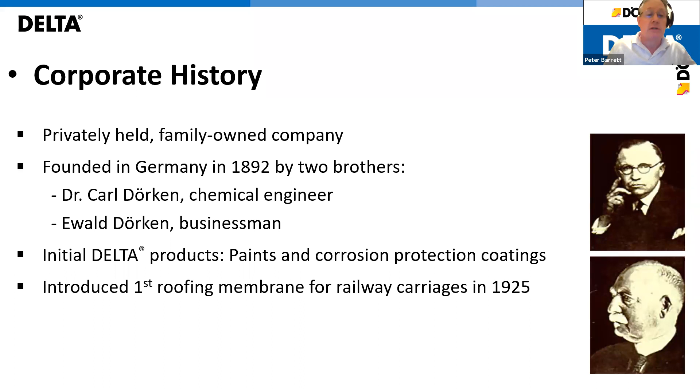We began in paints and corrosions, and we have since moved into all sorts of different construction product envelope applications. We make water-resistant barriers, the Rainscreens you'll hear about today, air barriers, vapor barriers, roof underlayments, garden roof systems, foundation moisture protection, mostly well known as our famous Delta MS, and we work on both residential and commercial construction.

My part of the presentation was done in conjunction with RDH Building Science Laboratories, which helps ensure that you guys get good technical information from me.

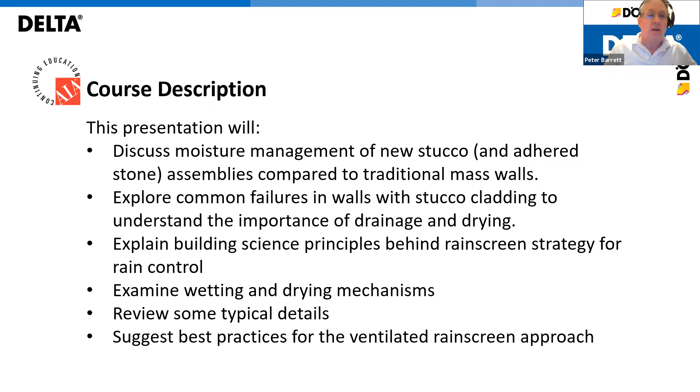So, Rainscreens - a builder's experience. We'll look at ventilated Rainscreens with moisture management. Today we're going to discuss moisture management of new stucco and adhered stone assemblies compared to traditional mass walls. We'll look at common failures within stucco cladding, and explore the importance of drainage and drying. We hope to explain the building science principles behind the Rainscreen strategy for rain control. We'll look at wetting and drying mechanisms, look at a couple usual details, then talk about some best practices for the ventilated Rainscreen approach.

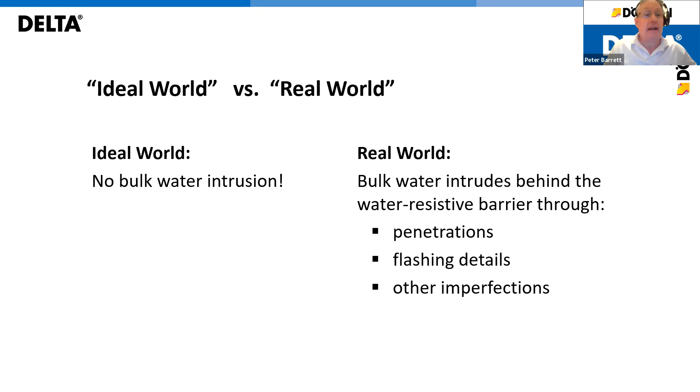So some common failures in stucco walls. In essence, the most common failure of stucco walls is water intrusion. In an ideal world, we have a perfect barrier and get no water intrusion. In the real world, we get water moving through our cladding, whether it's stucco, stone, or other claddings. We almost always get water through our cladding - it comes in through penetrations, through flashing details, and other imperfections.

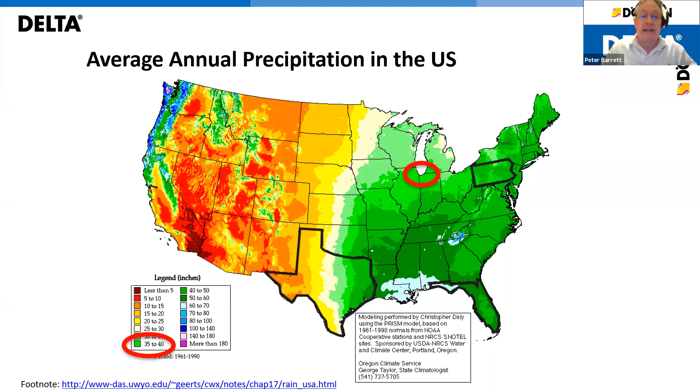Here is a quick look at the average rainfall in the US. The reason I'm showing you this is to show you where Chicago is on here, because this is where Chris's case study will take place. I just wanted to show that Chicago is a fairly moderate climate - it gets an average of 35 to 40 inches of precipitation a year.

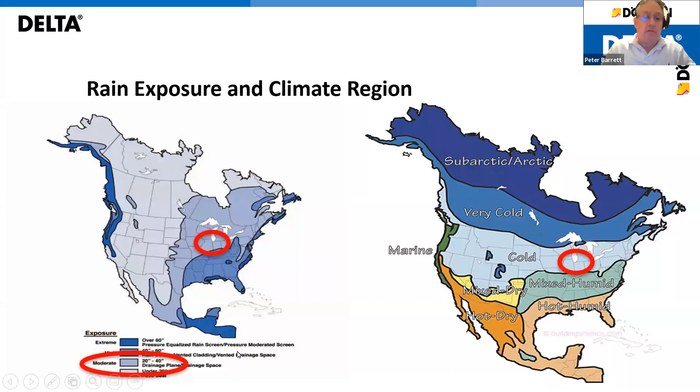By the same token, we want to look at rain exposure and climate region. Again, Chicago turns up in the moderate range when it comes to rain exposure for cold climate regions. You'll see 20 to 40 inches - in other words, you need drainage space in the wall.

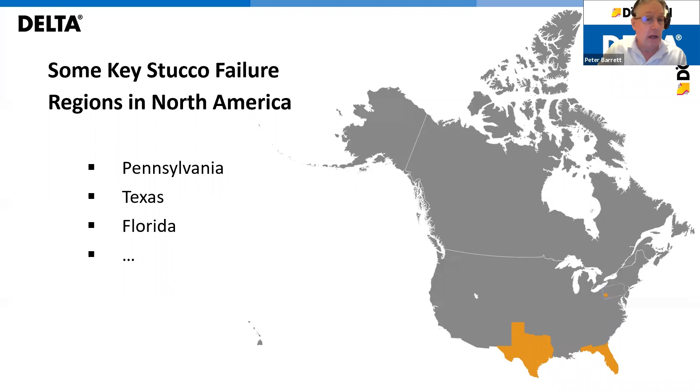Some key stucco failure areas in the US continue to be places like Pennsylvania, Texas, and Florida. What Chris is going to show you today happened in suburban Chicago, and I really wanted to show you that Chicago is not an extreme climate - it's a moderate climate, and a pretty common experience for both the US and Canada.

So why do stucco assemblies fail? Well, in essence, too much water gets through it - either through cracks in the stucco, through unsealed penetrations and transitions, or there's either no or insufficient flashing.

Additionally, when that water gets in, it's often blocked from coming out - in other words, there's no drainage for the system. Your system becomes a water collection device instead of actually draining water like it ought to. That usually comes from lack of weeps or drip screeds, or you haven't put the drainage in there properly, or there's lack of flashing so the water's running where it pleases, or the adhesion of the stucco to the WRB or weep screed is weak.

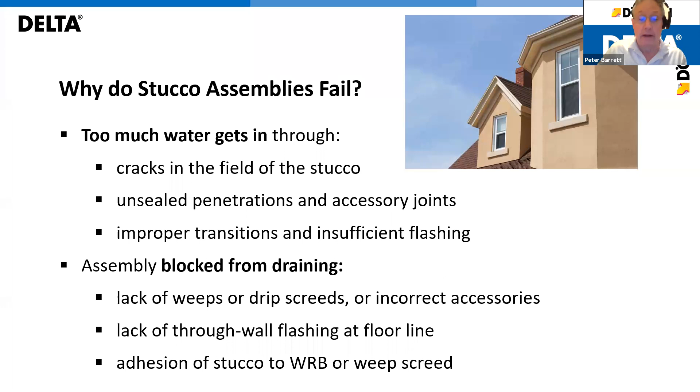Adding drainage capacity behind stucco is cheaper than replacing rotting sheathing. That's probably going to be the main topic of Chris's presentation, introducing some rain screen strategy.

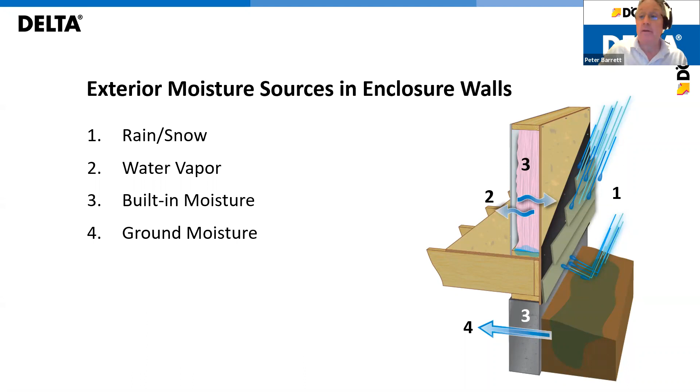What are the interior moisture sources for an enclosure wall? Wet building materials or water intrusion that sits in there—all of those wet materials will want to dry. When that water leaves the material, it has to go somewhere, and it usually goes into whatever cavity space it can find according to the moisture vapor pressures on it.

Then there's moisture from life itself, what we call operational moisture. Humans give off a lot of moisture through perspiration. We also like our plants and pets. We clean the place, we shower, we do laundry and dishes, water pipes break, or maybe we find it too dry and intentionally add humidification.

How do we control moisture? Moisture management is really what we're talking about today—what to do with the water when it hits. Rain control has four fundamental D's.

Deflection means when it hits, we send it where we want it to go, done through flashing and eaves troughs. Drainage is meant to keep the water out and send it to a collection point where we can carry it away harmlessly from the building.

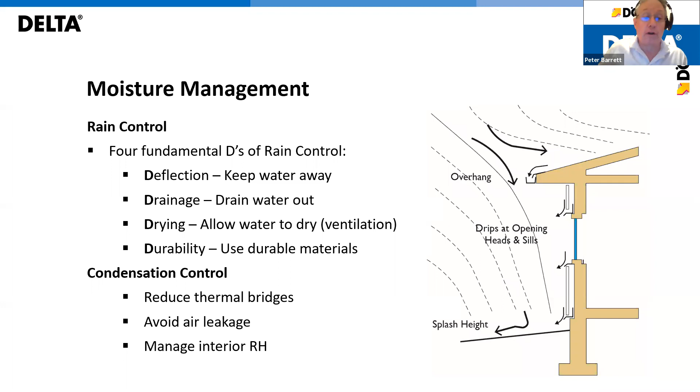We also want to control condensation. We do that through the reduction of thermal bridges. We definitely want to avoid air leakage, as air transports much more moisture than movement by diffusion. In doing so, we also want to manage our interior relative humidity, which helps manage the moisture vapor pressures within the building.

Concealed barriers—why do they fail? The concealed barrier is the barrier behind your stucco. What you're seeing here is an extremely common stucco assembly. From the inside out, you have framing, followed by sheathing, in this case most often wood-based.

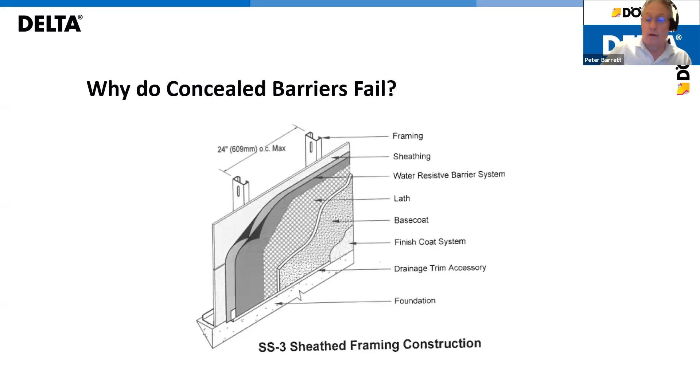Then you have a water-resistive barrier system. This can be either two layers of a 10-minute grade D equivalent building paper, or a single layer of 60-minute grade D equivalent building paper. Then there's standard lath, which could be metal or fiberglass. Then comes the stucco, base coat and finish, along with trim accessories. We're also showing a little foundation there. The ventilated rain screen is the most robust rain control strategy.

What does the building code say? The International Residential Code says—this was changed in 2006—that it requires a means of draining the water that enters the assembly to the exterior. It does not explicitly say what constitutes that drainage, and we have the same wording in 2018.

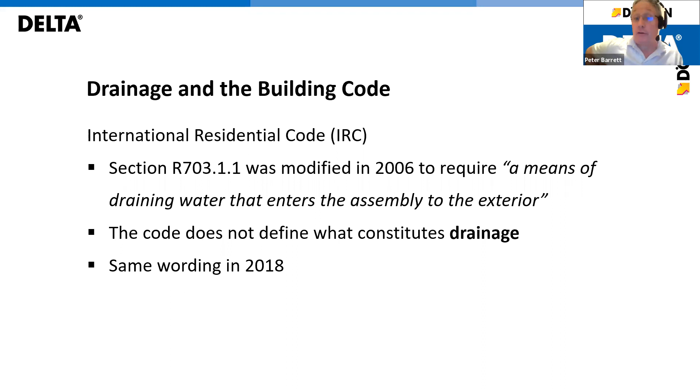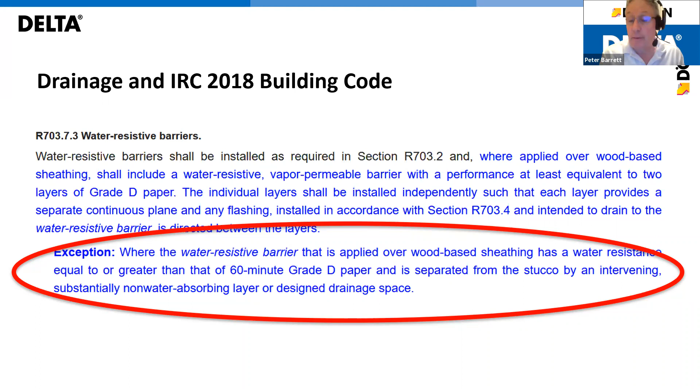Here's the actual section from the 2018 code. I won't read all of it, but the spot that interests us most is here—this is really where a rain screen can fit into the code, where the water-resistive barrier applied over wood sheathing has a water resistance equal to or greater than that of a 60-minute grade D building paper, and is separated from the stucco by an intervening substantially non-water absorbing layer or a designed drainage space. In this case, the dimple membrane or Delta-Dry that Chris will talk about constitutes both the substantially non-water absorbing layer and the designed drainage space, so that it meets code over wood-based sheathing, as long as you use a grade D 60-minute paper.

Which is, by the way, pretty much any decent water-resistive and air barrier—in our case, that would be Delta-Vent SA or Delta-Stratus, both of which are a grade D 60-minute equivalent. So what is a rain screen strategy? Well, we clearly want to shed it, and we do that with the exterior cladding.

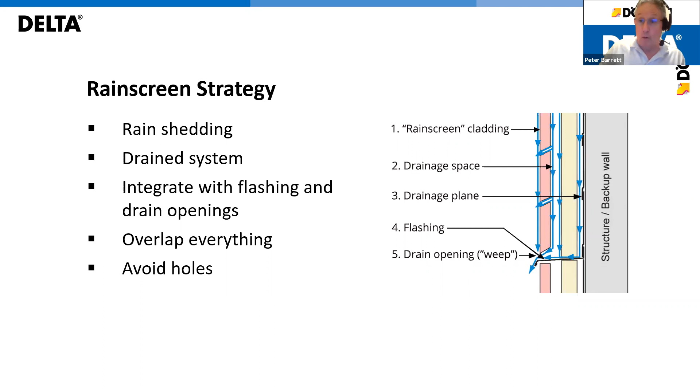Drained - that is space for when liquid water gets in, which may in turn drain out using our friend gravity. We want to integrate flashings and drain openings properly, shingled to the exterior so water runs to the outside of the building. Overlap everything, shingle downward, water runs downhill. We'd like to guide it correctly to the exterior. We do not want it to stand around, and obviously we want to avoid holes, which can allow both air and liquid water to get in.

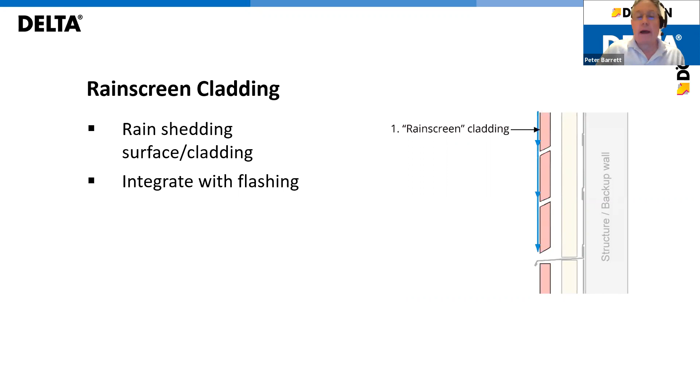So what is a rain screen cladding? Well, a rain screen cladding is a rain shedding surface integrated with flashing, with a structural backup wall and drainage space. Let's quickly look at how water moves.

I mentioned gravity earlier - gravity is our friend. Gravity can help us, using flashing, redirect water to the outside, which basically saves it from hanging around. We clearly design houses that way quite regularly. As you can see by the little drawing there, we generally always design a building to direct water to the outside, or we should always design it to direct water away from the building.

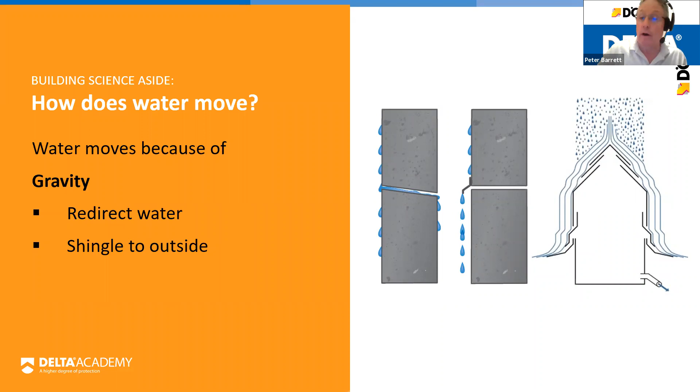Another big problem is capillary wicking, with the cohesion and adhesion of water and its surface tension. What that basically means is water can travel quite effectively through a small crack in any material. It can travel up concrete substantial distances, and it can travel up wood substantial distances as well. How do we know that? Well, trees have leaves at the top and not the bottom, so we know that capillary action of the wood allows water to move up to feed the leaves.

So how do you handle capillary wicking? Well, as you see in the drawing on the right, we put in a capillary break - something that is non-porous, that does not allow the water to continue to move.

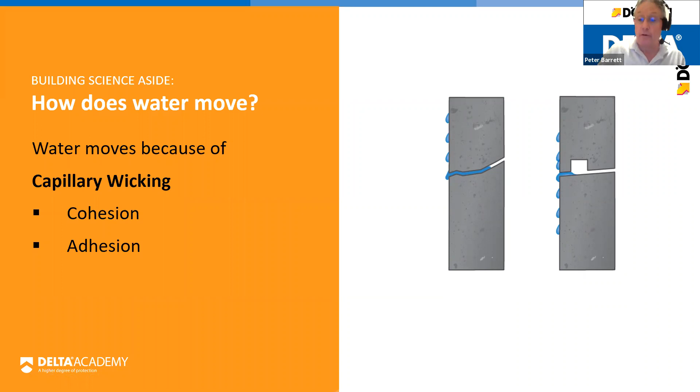It also moves through pressure differentials. We get many pressures on the house, in particular wind pressure. So on the windward side is an area of high pressure, and on the leeward side becomes an area of low pressure. This is essentially the same thing that makes airplanes fly, but that has a different meaning on a house, because if you get high pressure to the windward side, the interior of our house is actually lower pressure relative to that high pressure.

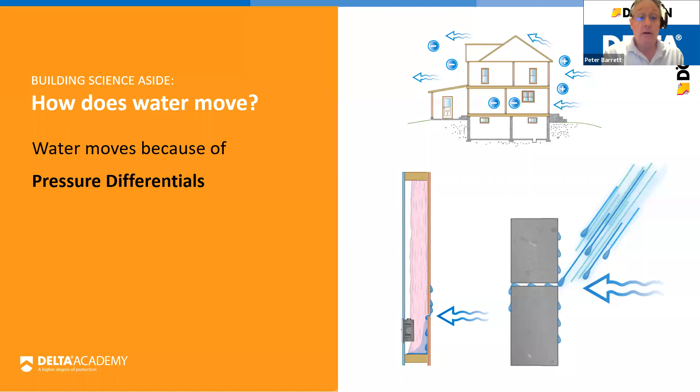What does that mean? If you have a hole in your wall, our drawings below show that if you put pressure on the wall and you have moisture, in essence your building will start sucking water in those little holes, because it's high pressure on the outside, lower pressure inside. In essence, it gets sucked in.

The drainage space - a drainage space obviously creates a space for liquid water to flow down. It actually doesn't take all that much space in the wall to get the drainage portion itself. Anything from 1/8 of an inch to 1/4 inch will give you drainage. What 1/8 of an inch to 1/4 inch does not give you is ventilation. So we're distinguishing here between a drainage space and a ventilation space. With a larger gap, you also get airflow, and the airflow helps moderate the moisture in the cavity - it takes moisture from the cavity to the exterior.

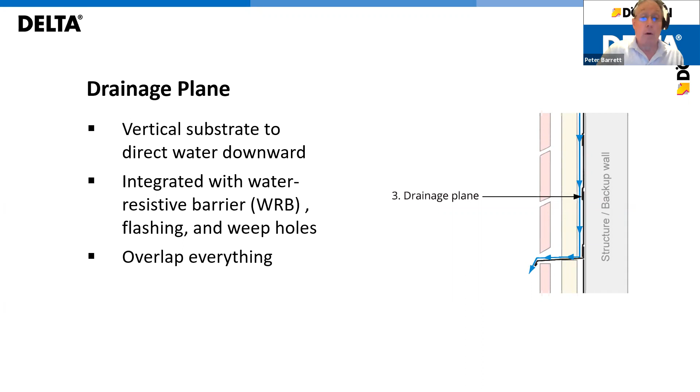We also have a drainage plane in our rain screen. Again, this is a bit of a repeat of what I said earlier, but I'll say it anyway: shingle downward and allow the water to flow to the exterior, integrate with your flashings. Flashings are really any material that will act as a drainage plane and shed the water as opposed to absorb the water.

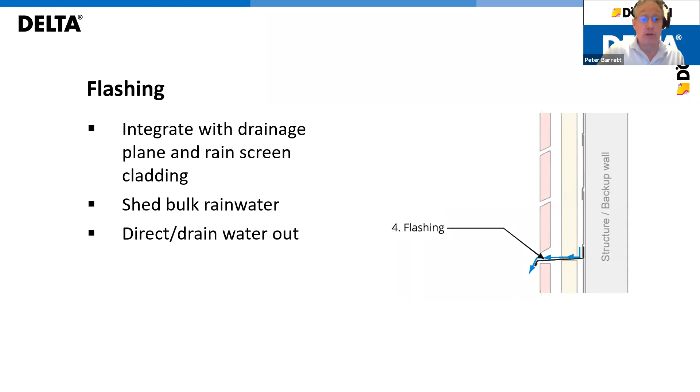An opening - this sounds very sensible, that if you're going to put a drainage space in there and we're going to allow water to drain down, we would like someplace for it to go once it gets there. That would be our drainage hole, or our drain. That drainage hole will allow liquid water to move out, it will allow fresh air to move in, and it will help promote venting and ventilation.

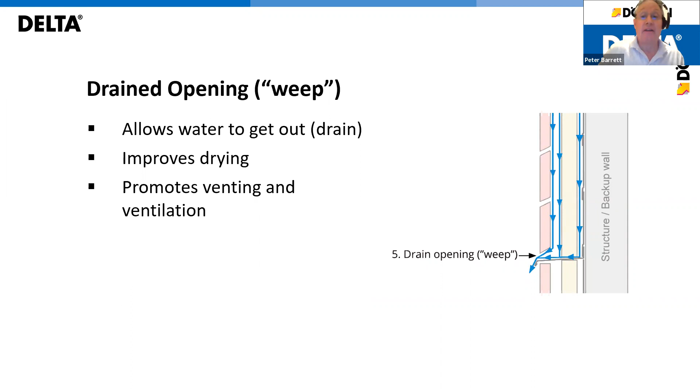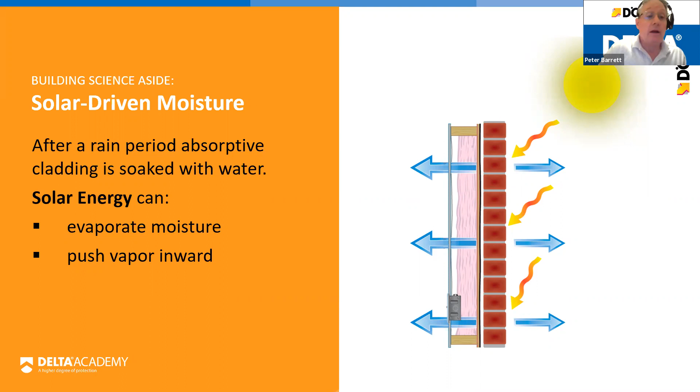Solar-driven moisture - in building science, we're going to talk about solar-driven moisture because not everybody even believes that this exists, but it is a significant problem whenever you're using an absorptive or reservoir cladding. So the cladding itself will absorb moisture, and solar energy will both cause the moisture to evaporate but will also push the vapor inward. This is just an example of, let's say, some manufactured stone that is a reservoir cladding.

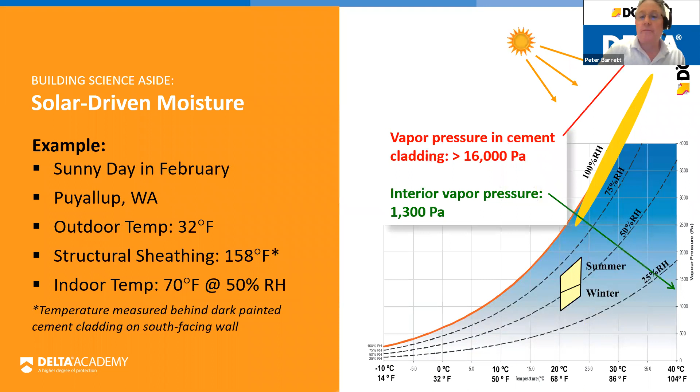So how does this work? Well, if we have indoor conditions at a pretty typical, let's say 70 degrees Fahrenheit, typical interior 35 to 50 or 65 percent relative humidity on the inside - sorry, just got to move things here so I can see.

As the sun hits our exterior cladding, it heats it up. If we have a stucco cladding, it can get very hot just due to the solar energy, and it can create a moisture vapor pressure greater than 16,000 pascals. But because it's cooler and drier inside, we have an interior vapor pressure of around 1,300 pascals. As this notes here, your sheathing temperature can get up to over 158 degrees Fahrenheit.

One thing we always know about moisture vapor is it moves from areas of high concentration to areas of low concentration, seeking stasis. The high moisture vapor pressure on the outside means that a lot of that water that is soaked into this wall like a sponge cannot dry to the outside. It has no choice but to move inward.

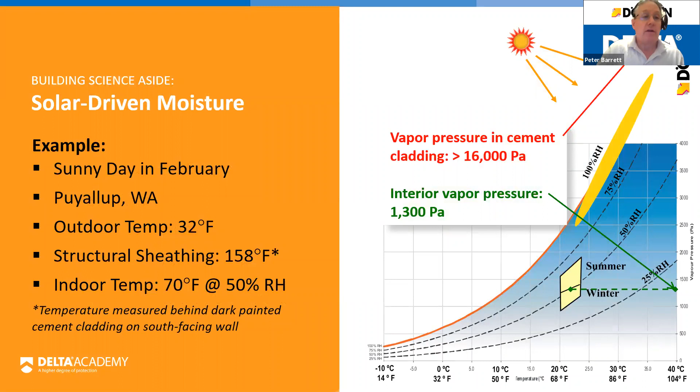You can basically see on this, I guess it's a small version of a psychrometric chart, that solar-driven moisture does exist and can drive significant amounts of water in.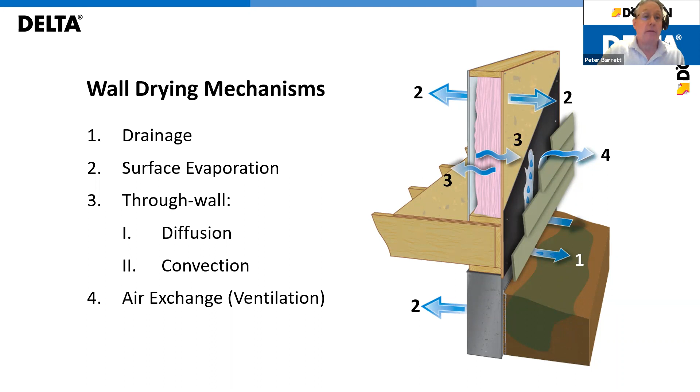Once we have moisture, how do we dry it? Well, through drainage, as I said, through some surface evaporation, but also through the wall, through diffusion and moisture vapor permeable membranes, and also through convection, which we take advantage of with the air exchange, adding ventilation that allows the warm, damp air to move up and out, bringing cooler, drier air in the bottom, thereby moderating the humidity in the cavity.

There's a bunch of different ways one can apply cladding. A direct cladding would be, let's say, some lumber siding that's just put directly on the WRB, or even stucco placed directly on the WRB. Vented means some air can get behind it - a good example of that would be vinyl siding. Or ventilated, that has both a drainage and ventilated space. As you move from left to right, incorporating a ventilated rain screen actually reduces the risk of mold and rot and improves the sustainability.

In summary, water will find its way behind the water resistant barrier. Depending on your climate and region, the stress of that or the rain load could be even higher. Most stucco failures involve cracks, penetrations, sealant joints, blocked drainage paths. By giving water a place to go, that means that it will not accumulate in the wall. And by adding drying energy, the water that does hang up in the wall or the moisture vapor that comes off our wet material or through the other sources has a place to go. It can rise and dry out, and the system is moderated.

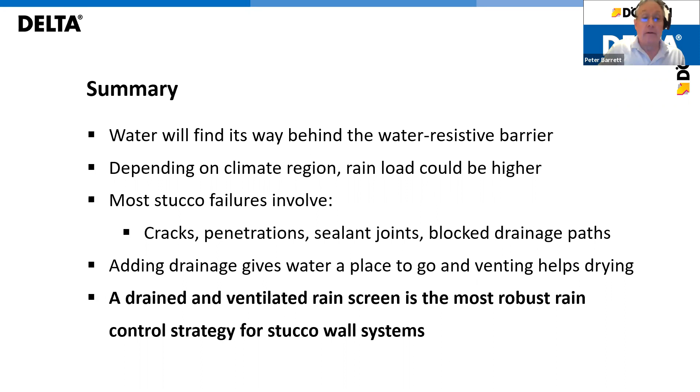Therefore, a drained and ventilated rain screen is the most robust way of controlling moisture in a stucco wall system.

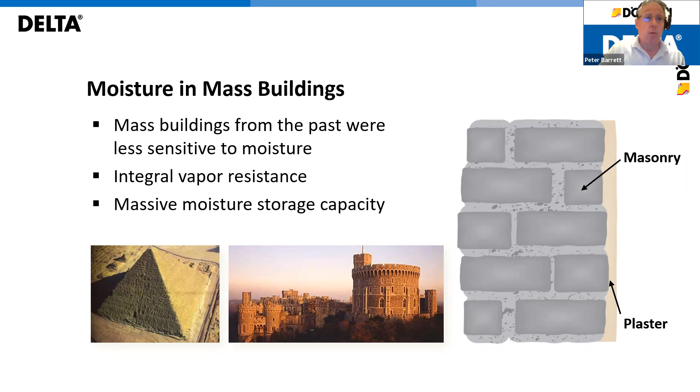So let's quickly look at a mass building. This would be anything with large stone, limestone, even the pyramids. They have an integral moisture vapor resistance. They have a very large ability to store water that hits them without incurring any damage at all. It used to be that they would just put stucco directly on a mass wall.

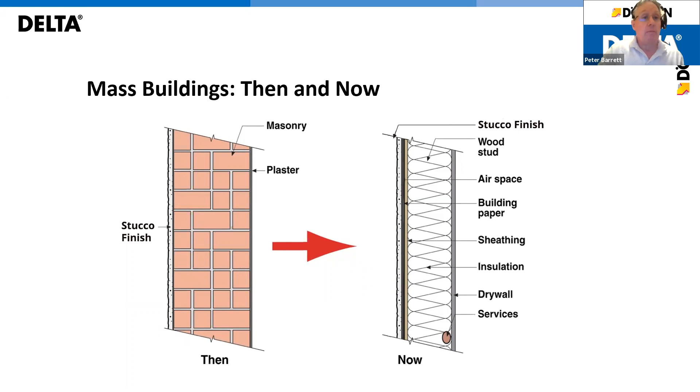Probably not much of an issue, but we've changed the kind of materials that we use. We don't build with mass walls so much here anymore. We use much more moisture sensitive materials - drywall, wood, insulation, papers, whether it's on the drywall or otherwise, all of which can be adversely affected by moisture much more significantly than could a solid masonry wall. What does that mean? Well, that means that the management of moisture becomes more critical because our materials are much more sensitive.

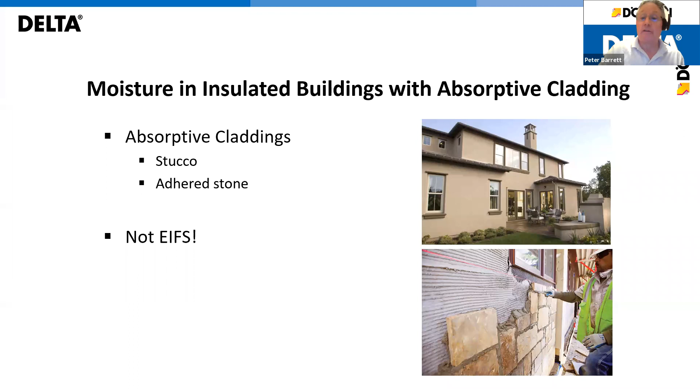Not only that, but we've added a lot of insulation to the building. In this case, we're really referring to absorptive claddings like stucco and adhered stone, but not EIFS.

A wet cladding will allow inward diffusion through a vapor permeable membrane. It's a really important point - anything that's moisture vapor permeable is moisture vapor permeable both ways. There is not a way to have a material that only lets moisture pass through it one way. So if it allows moisture to come out of the building to dry, it can in turn also allow moisture to be driven back into the building by processes such as solar-driven moisture.

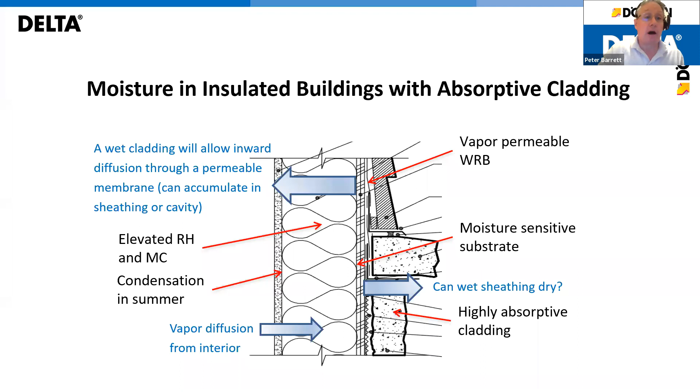Considerations for moisture management with highly absorptive claddings, again stucco and manufactured stone: poor drainage is a problem. As I said earlier, water gets in but can't get out.

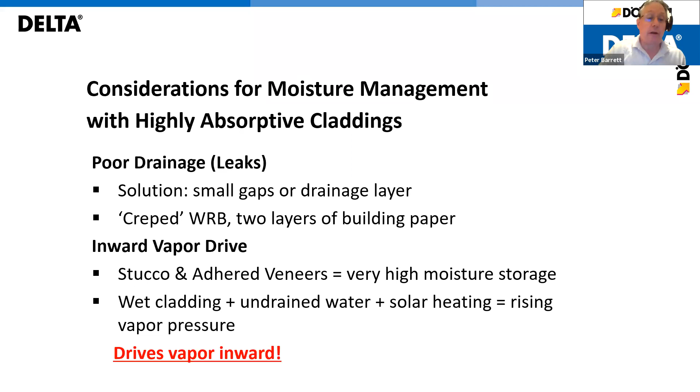There are some solutions. You can put in a small gap or a drainage layer, anywhere from 1/8 to 1/4 inch. Sometimes that can be achieved by creped stucco building wraps or two layers of building paper. But because stucco and adhered veneers have very high moisture storage, and solar driven moisture due to solar heating can create moisture vapor pressure and drive the vapor inwards.

So heat, air, and moisture flow in the ventilated air gap. First, with a solid impermeable product, it will deflect and drain the bulk water. A big question is often, if I put an impermeable product in there, am I not putting in a second vapor barrier? The answer is no, because this is not detailed as a continuous vapor barrier.

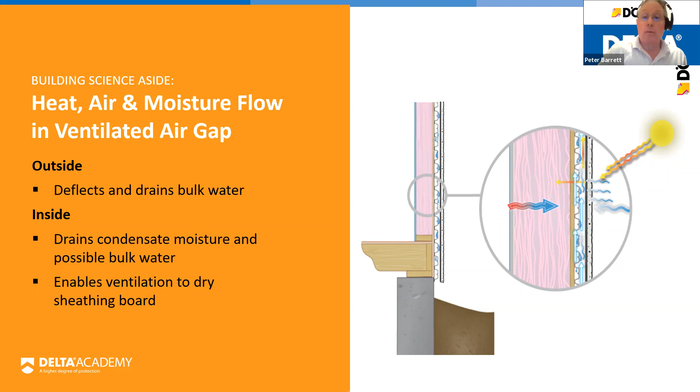It's extremely important to the function of a rain screen that you have ventilation at the top and at the bottom. With that ventilation, it will not act in any form as a vapor barrier in the wall system. It does, however, enable ventilation to dry the sheathing board, allows any condensation or bulk water to drain out, and prevents the inward drive of solar driven moisture.

This is just to show you quickly what a top detail looks like. You can see there's about a 3/8 inch gap between the flashings for ventilation. It doesn't have to be a huge gap, but you do need a gap.

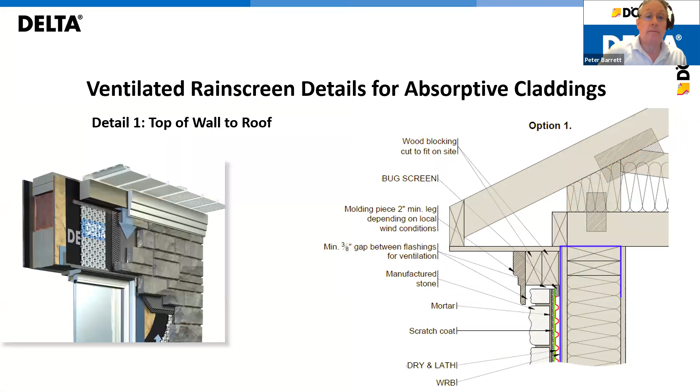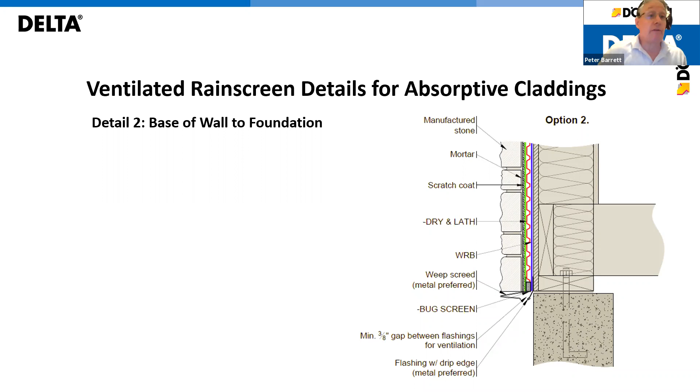Similarly, at the bottom of the wall, just using a typical weep screed—nothing special about this. You would install your stucco the same way you normally do, just in front of the material. So no additional fancy changes. You can see in this picture, it's the same weep screed you would normally use.

So to summarize, we use a lot of different materials. The old walls are not like the new walls. We didn't build the same way your grandfather did. New stucco walls need to be detailed in order to allow moisture that gets in to get out, and to allow water that hangs in the wall to be dried. A drained and ventilated rain screen is the most robust rain control strategy for stucco and stone walls.

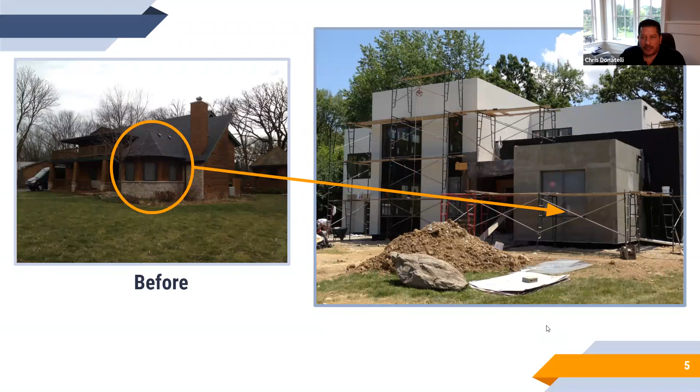To give you a little perspective of the scope, I included this before picture, circled the front area where you could see the before and after. You can also see the stucco starting to go together, in progress. Some areas in black are where the future wood siding accents will be, but the gray and white is all stucco.

When we started this project, there were already concerns in my area about different types of stucco, and I was certainly concerned with putting stucco on a building because of some of the problems I had seen.

In addition to the minimum code requirement, we also installed a WRB consisting of a stucco wrap, promoted as something that helps drainage, and we also installed a small gap drainage mat. I had assurance from everybody I talked to at the time that this combination of products was all we really needed to keep everything safe.

So the wall assembly was 2x6 studs, dense packed cellulose insulation with OSB sheathing. We then used the stucco wrap as the WRB, and a small gap drainage mat. In limited areas we used polystyrene foam, due to some details the architect wanted to achieve in terms of returns around some of the windows.

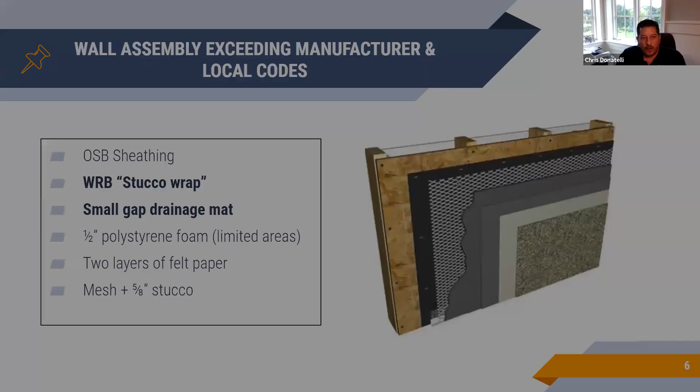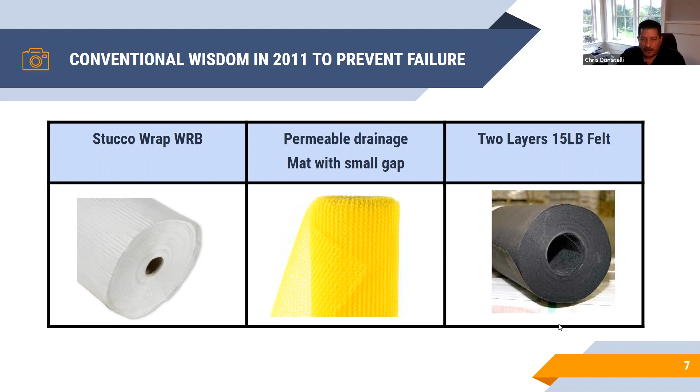So my conventional wisdom in 2011 was that a stucco wrap with a drainage mat and 2 layers of felt was certainly going to keep us safe on this project. That, of course, assumes you're taking the time to detail everything properly and carefully executing everything, because none of this matters if it's not carefully executed.

So now let's fast forward 10 years and take a look at what we actually found as we started to realize there were some problems, and made the decision to take off all the cladding.

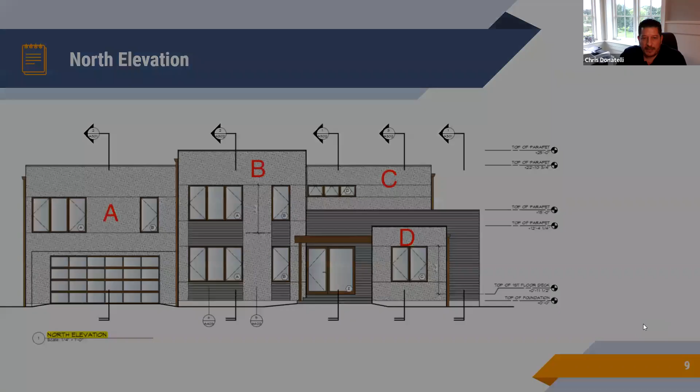So this is the north elevation, which is the front, and this is what we noticed when we started to take this apart. The north is one of the exposures that gets the least amount of sun. Both the north and east get a lot less than the south and west.

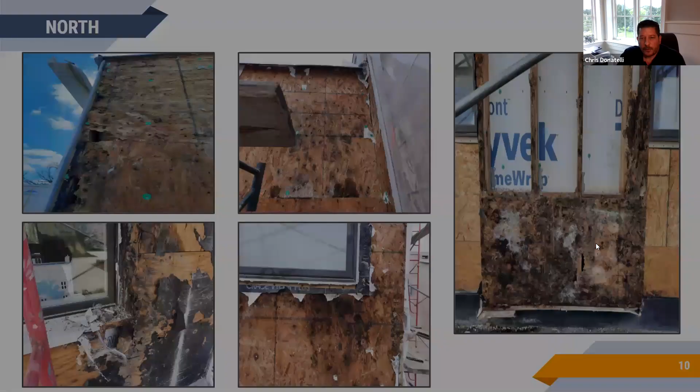So now we move to the east elevation. Again, this is an elevation that doesn't get a tremendous amount of sun. I'll also note that there's not a tremendous amount of trees around this house, so the natural movement of the sun is pretty much unblocked on most of these elevations, just as a side note.

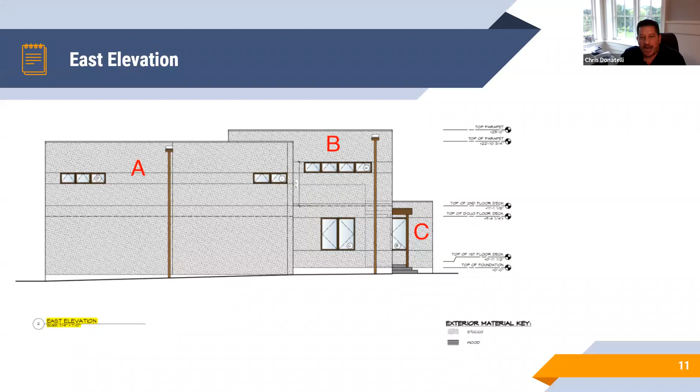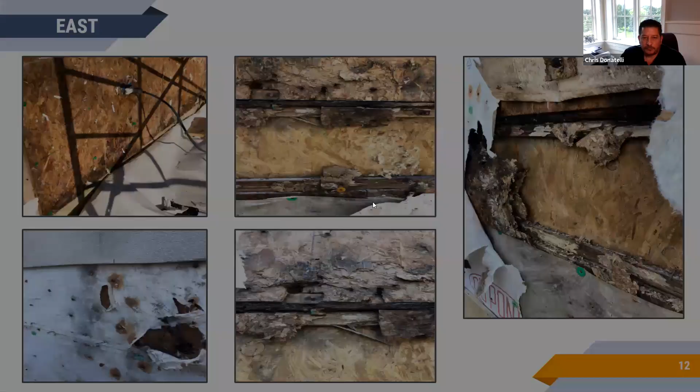Now we're going to go to the south elevation. And, you know, we get quite a bit of sun here.

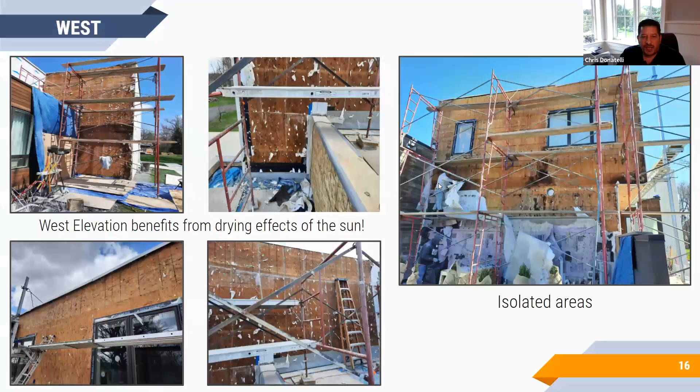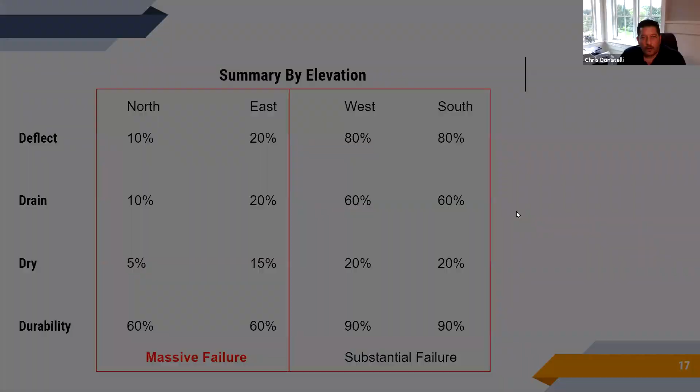So with what we saw in this project, and with what I've seen in other projects, I wanted to put together, more or less in bullet point version, what I feel are the top challenges as a builder to get to the point where we can really ensure our walls are going to be constructed in a way that they'll last. And when I say last, I think we live in a pretty disposable environment, and my definition of a wall that's lasting, or most things we do in the building business, is my goal to strive for 50 years. If I could get something to last 50 years, I feel I've done a good job with it. Anything that falls below that, that needs to be replaced for any reason, in my mind is not really hitting the mark I'd like to hit. So here are the top challenges as I've assessed them.

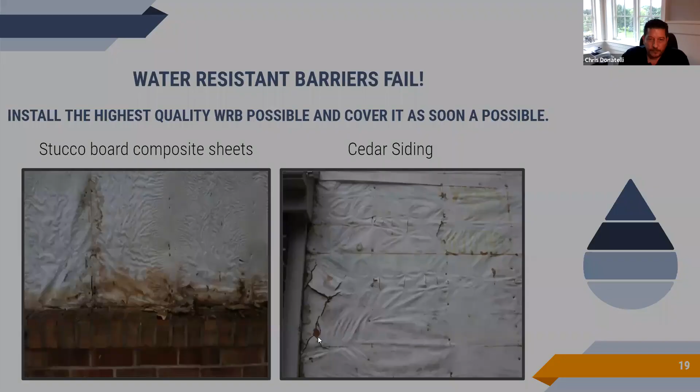So number one is water resistant barriers fail. I've seen this over and over. The picture on the left is a house I was just driving by as the siding installers were starting to take off stucco board composite, a sheet material. I happened to get there as they were removing it from the wall, and what you could see is that the like-new characteristics of that building wrap don't exist anymore. As a result, it's not doing its job.

If you look down by the bottom, you'll see there's actually been voids created, which I believe is just due to the material being in constant contact with the WRB and having that area be wet and dry over and over. So it's not just stucco that this exists with. This happened to be with a sheet.

The picture on the right is a project we did where we removed cedar siding, and what we found was multiple tears in the building wrap. These tears obviously weren't there when it was installed. This just developed through the process of the WRB being in constant contact, I believe, with the lumber, being wet and drying.

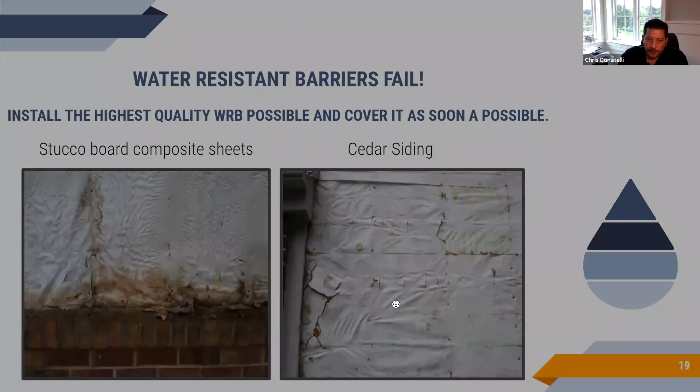So here's just a bigger picture of a wall. This was horizontal cedar siding, traditional cedar siding installed directly to the wall. You could see the amount of staining that existed in these common areas where the siding was installed in a shiplap pattern. I don't really believe water was penetrating through the siding or getting over it. I believe this was basically due to moisture moving from the interior to the exterior, and both ways at times when the wall had to dry in either direction. That's going to depend on the outside temperature, the inside temperature, and some different things like that. But you could really see the amount of water that had been sitting there over a period of time.

So the second thing is to really, really choose your rain screen carefully. I tried to assemble a couple different types of rain screens that we use. The first being a large gap strip-type rain screen. The photo on the left is a PVC rain screen we've used, where it just has cross ventilation through it. If you're installing something like horizontal siding, whether cement board, cedar siding, or any of the composites made today, we're using that type of rain screen with all of them. We're never installing anything directly against the WRB anymore - we're always allowing for that ventilation.

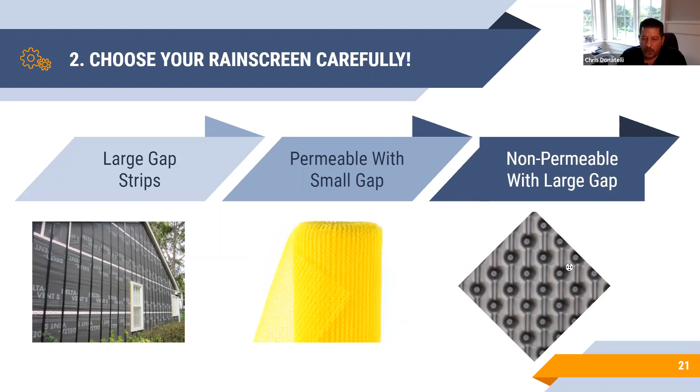As I've gone through this, trust me, it's not fun to have any project you've ever done where, despite your efforts or intentions, it fails, and that gets associated with your brand. None of us want that. When people go through these types of things, it's usually a surprise to them. They're not expecting a problem with their home that requires a solution costing several hundred thousand dollars to remedy. Hopefully what I'm providing today will help you learn from what we've experienced so you don't have to go through that hardship.

So if I were going to select a rain screen for a cement-based reservoir cladding, I would insist on the following 4 items at a minimum.

Number 1: a large gap of at least 3/8 of an inch to prevent accumulation of water and wicking of any type. The second thing is I'd want a product that is non-compressible. Sometimes when installing these mats, they have a tendency to compress, which could take away from the benefit of having that intended gap.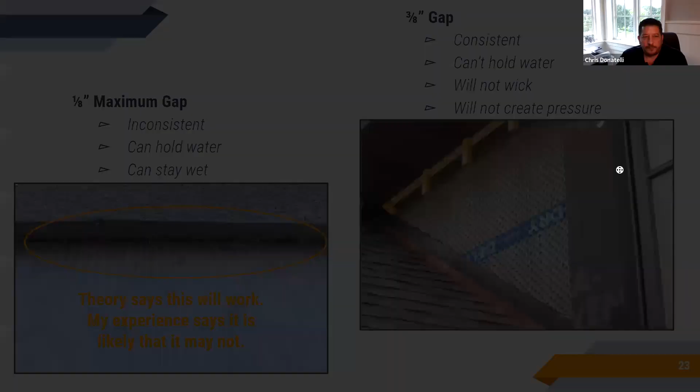So the next is the non-permeable part.

This is somewhat of a repeat of what Peter mentioned, but I absolutely believe we saw this going on with this project and others, where there's signs that in some cases the wall is drying outward, passing through the permeable building wrap and the rain screen, and then that moisture enters the cladding. Other times the cladding fills up with moisture and gets driven inward, passes through the permeable WRB, and enters the wall cavity. So I believe it goes both directions. I think we've seen that.

The picture on the right shows how any moisture that hits that surface drains down the front. Here you can see there's a bug screen at the bottom that gets lapped over, in this case our copper tins, allowing dissipation of that moisture to just drip right down through it. So the characteristic of something non-permeable is very different from something permeable, and in my mind it's very important.

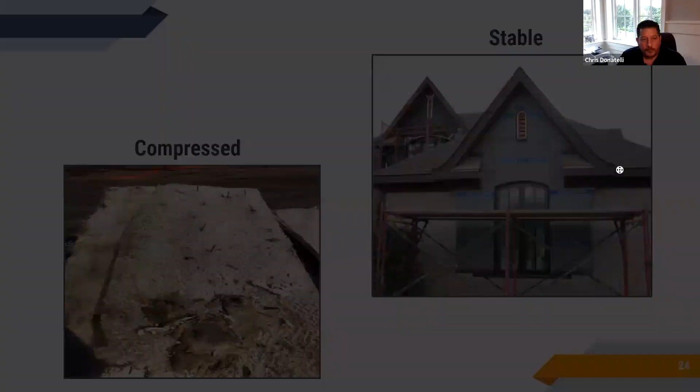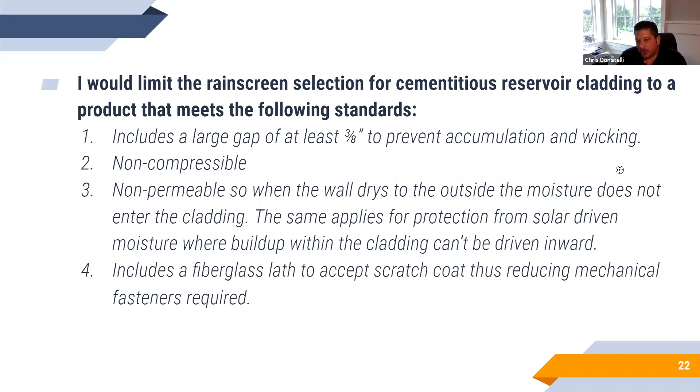The next one might throw some of you, especially if you've never sat down to think about it like I did the other day - including a fiberglass lath to accept the scratch coat, thus reducing the mechanical fasteners required. As I went through this with Peter, we both had a little laugh because this wall looks like it was at a shooting range for about 5 years.

I estimated that on a 6,000 square foot wall surface, there were 72,000 fasteners that passed through the water resistant barrier. Most water resistant barriers do not seal around those - the fasteners just pass right through. So on this 6,000 square foot surface, the first thing that typically gets nailed is the WRB itself, which has to be held onto the wall sheathing.

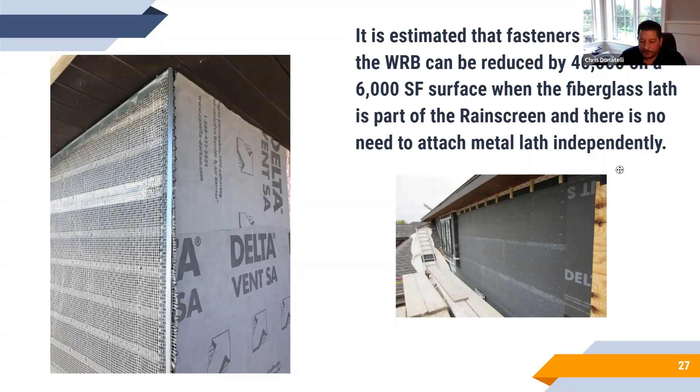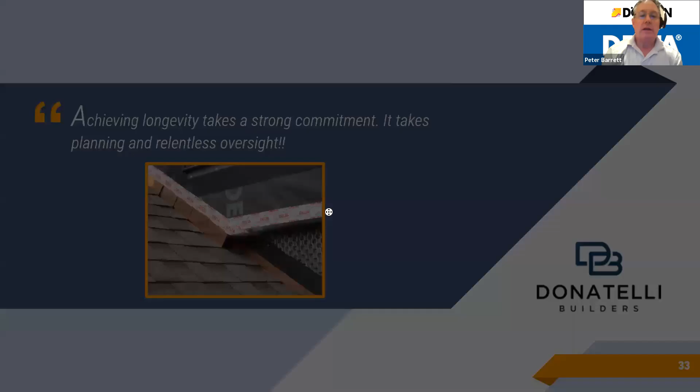Can I jump in quickly, Chris? Sure, Peter. I wanted to point out, you showed a very nice picture earlier of that one board in between that was all covered in mold. Where that air leakage occurred, it would be much more localized to the hole or defect where the air was passing through. Yeah, this one is all across the board, which indicates it's another moisture vapor issue. That's a great question.

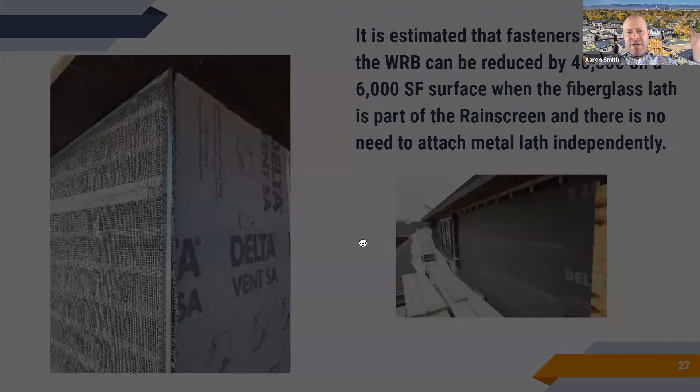Yeah, I think even on the east side, we saw there were no pinpoint areas where you'd have an air leakage problem showing itself. It was pretty widespread across the elevation.

The second question was around you saying about 40% of the house had continuous insulation on it. Did you see a difference in the areas with continuous insulation, or was I wrong about that number? I noticed no difference. Again, when we detailed the house with the insulation, we used a dense pack, which obviously works much better in terms of limiting air movement compared to something like fiberglass batt insulation. And even in areas where we took the plywood off, that insulation remained pretty much intact, and it was pretty tight within those wall cavities.

So I did not actually notice that difference. I think what some people might be driving at with that question is that best practice in building is to actually use an outer continuous layer of insulation to prevent the condensation point from being at the back of the plywood. I've done dew point tests on other projects. We didn't do one on this, and frankly this wasn't installed for that purpose. This was only a half inch, which I don't know if that would have been enough to really make a difference that way.

But I think what's really telling about that question is not where we installed the foam, but where we didn't install it. Because in this area here, we don't have a differential in temperature between the front side of the sheathing and the back side of the sheathing. That back side of the sheathing should have been like an unconditioned attic that was really, really cold. I was not expecting this kind of damage in these areas that we built out this way. This was a bit shocking to me. I think this speaks more to the moisture getting through that non-permeable rain screen.

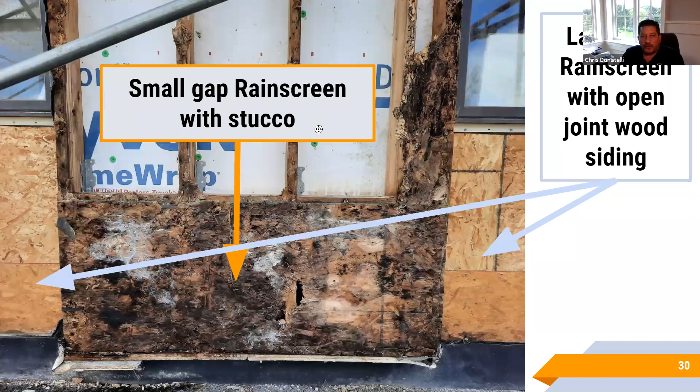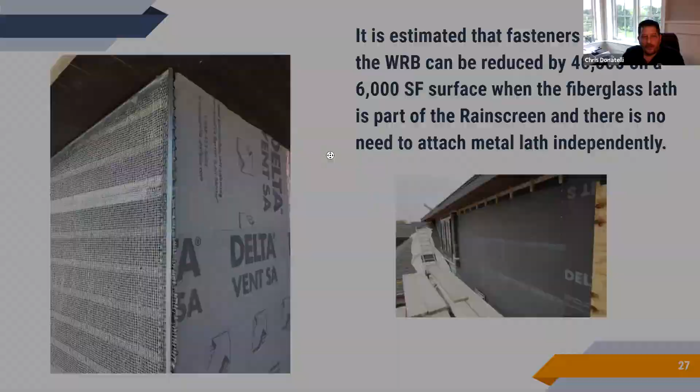Possibly even being -- I believe that, if you look here, although these are plastic cap nails, if we go back and look at this picture of this wall, again, those galvanized nails are not going to rust unless there's constant water up against them. My suspicion is that we did something with good intention, but it didn't have the result we expected. We used a rain screen, a drainage plane type mat, because at the time, that's what I believed would really do the trick.

But I don't have that same belief anymore. I would never, frankly, use one again with that type of product. This really opened my eyes to a lot of things I wasn't necessarily thinking about before, and it helped me ask the question: why is this happening here and not there, or what's going on here? I'm hoping these photos demonstrate to everyone, knowing about the way the walls were constructed and what we did, to help formulate their own questions and feelings about what they're looking at.

One question I think we all want to know: Peter, does Dörken Systems have architectural details available on your website that we should include in our plans to detail this out correctly for future projects? If so, can you chat that in, and we'll put that in the resources section at EEBA?